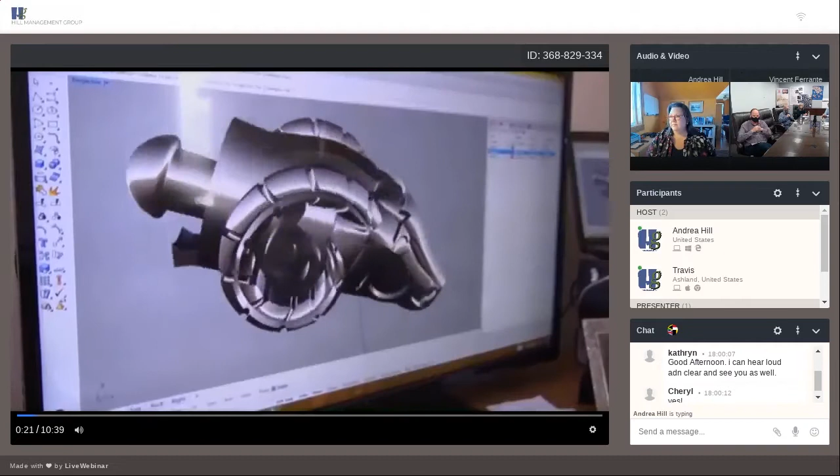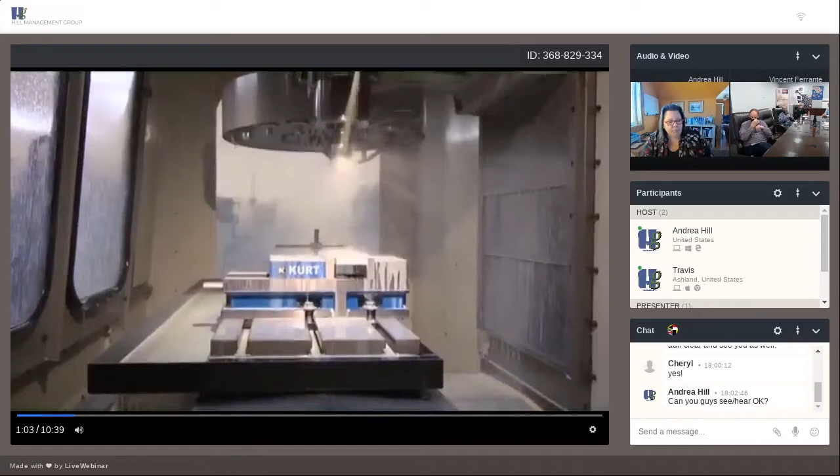National Chain has complete manufacturing capabilities. We can actually work from basic gold and bullion to finished product. We're one of the few companies in the industry that can offer a full service like this. With those capabilities and the talents of highly skilled craftsmen, National Chain Group produces an extensive line of precious and semi-precious pendant and fashion chain, earrings, findings, tubing, wire and beads, all at the highest standards. Their craftsmen have decades of experience, their machinery and technology is state-of-the-art, and they are vertically integrated—everything is manufactured in their own buildings.

We keep control of the process right from the grain, turning it into wire, flat stock, and tubing, and it's all measured for precision to make sure it flows through the process flawlessly. Among the more than 2,000 chain machines is some of the most specialized cutting-edge machinery in the industry, resulting in a consistently high-quality product for its clients.

National Chain Group, with its facilities in Rhode Island and Santo Domingo, produces millions of feet of chain and jewelry products annually. The offshore plant in the Dominican Republic enhances the company's manufacturing capacity, reducing costs for its customers who get a high-quality product on time and at competitive prices.

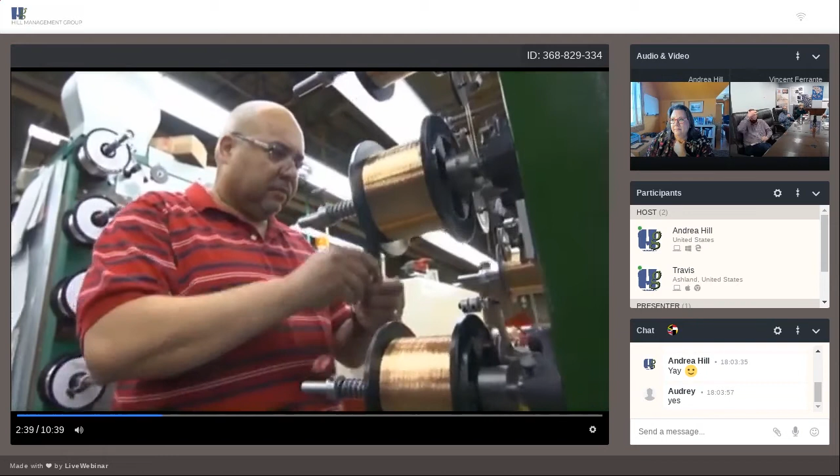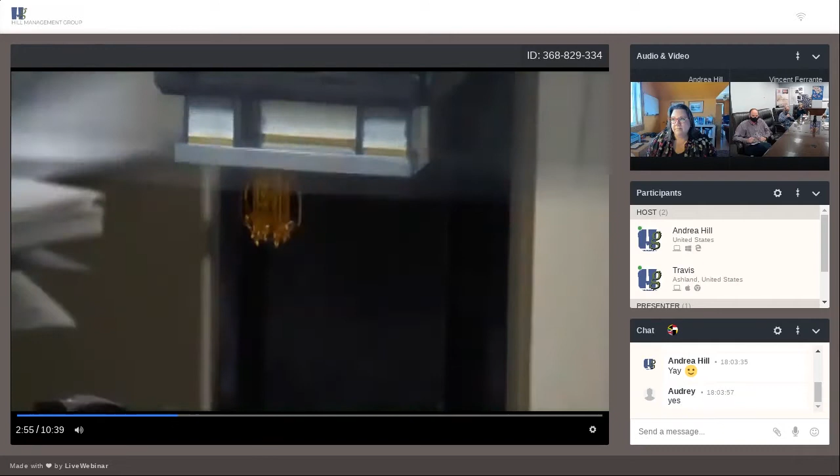Even with its impeccable reputation as a worldwide leader and one of the most respected full-service custom jewelry manufacturers in the world, National Chain is not sitting still. One of the keys to National's success is the fact that the management has decided to invest yearly in the development of new technology and new equipment. The rapid prototype equipment is cutting edge, top of the line.

This drive to vertical integration began in late 1997 when National Chain President Steve Cipolla decided that to increase his company's self-sufficiency and flexibility, it would begin making its own wire. The decision made a great deal of sense given the company's reputation as a prime supplier of pendant and fashion chain, the production of which required enormous amounts of wire on a daily basis.

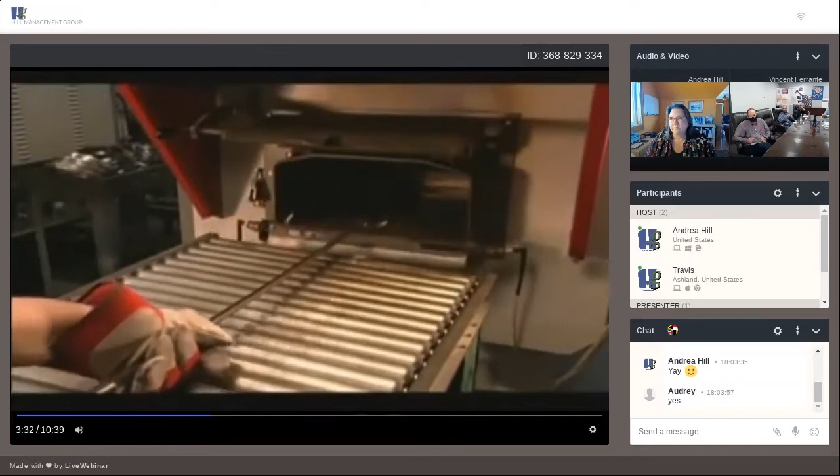Cipolla invested in the necessary equipment, from continuous casting machines to rolling mills and strand annealing furnaces. Wayne Wiesner, the company's special projects manager who oversees all of the company's mill operations, says that Steve is never afraid to invest. Even more investments enabled the company to produce tubing and flat stock for its findings division, along with solders in various grades. With each new investment, the vertical integration deepened.

But what began as an effort to make National Chain increasingly self-sufficient soon turned into a boon for its customers, who began turning to the company for their own metal needs. That demand ultimately led to the creation of a new division, National Fabricated Metals. Today, that demand continues to grow.

For example, Wiesner estimates that the company's weekly production of wire, if strung end to end, would span 2,000 miles. To put it in more visual terms, that's enough wire to stretch along the entire East Coast from the northernmost tip of Maine to the Florida Keys.

Such success has required the company to expand its mill operations, which are all conducted at the National Chain Headquarters Complex in Warwick, Rhode Island. A new addition there is increasing the company's total manufacturing space to 230,000 square feet.

What truly separates National Fabricated Metals from its competitors is not just its capacity, but also its flexibility and its ability to meet a range of customer needs. In that way, the mill division shares many of the same advantages enjoyed by all of National Chain's divisions: a breadth of expertise, high-tech equipment, and cross-functional operations. Those qualities also provide National's customers, from volume producers to specialty manufacturers, with an unparalleled competitive advantage.

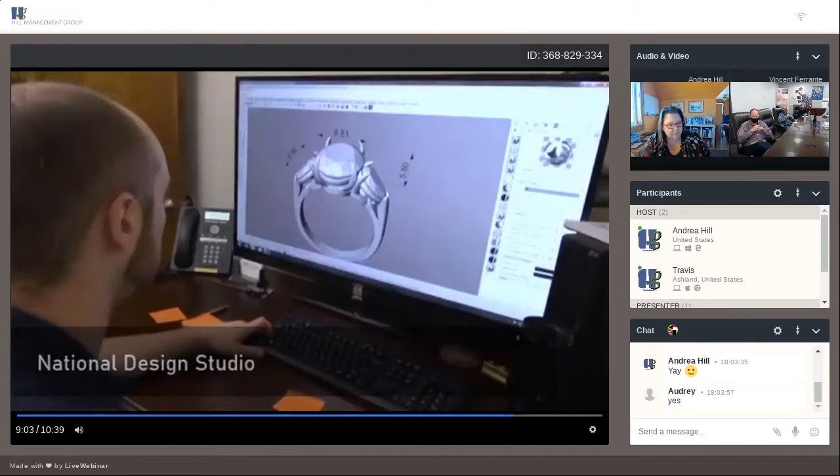National Design Studio can produce custom metal molds, personalized chain, findings, and jewelry.

National can also take a design from model to finished casting, on time and on budget, with their Village Goldsmith and Colorado Casting division. The Village Goldsmith has a 30-year reputation for superior production services, from CAD/CAM to casting, stamping, and sintering.

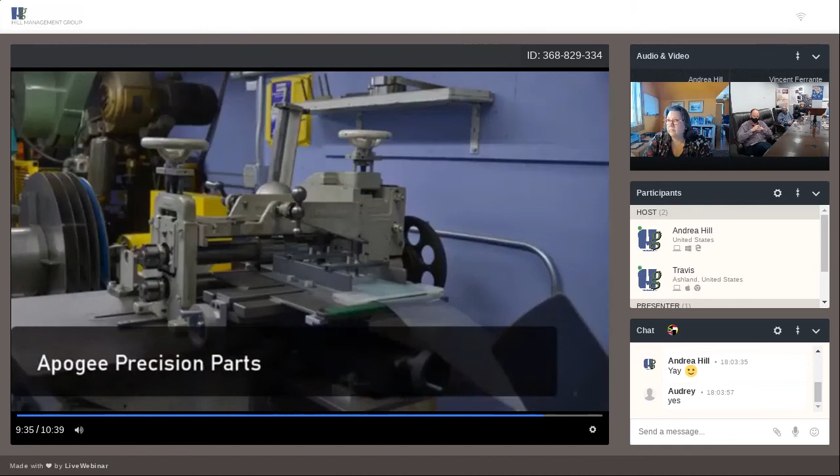Apogee Precision Parts is a dock-to-stock supplier that specializes in stamping and deep drawing metal parts for a range of industries. It manufactures everything from charms to capacitor components, medical implants, and diamond drill bits with zero defects.

C&W Steel Stamp Company is National's most recent acquisition. C&W offers high-end coining and striking services. It produces everything from charms and ID tags to coins and components with precise detail and accuracy.

The latest and finest technology, quality, old-world craftsmanship, exclusive chains and jewelry for any client's needs. That's what National Chain Group is all about. National Chain Group is committed to getting better every day. Contact them to see for yourself why they continue to prove to their customers that the possibilities are endless.

Over here from... there we go. All right, I think we're back on screen, right? Can you guys see me? Yes, we can. A little drag on this line today. I hope it was just the drag of fixing the screens and not a voice drag. Anyway, that's a lot going on.

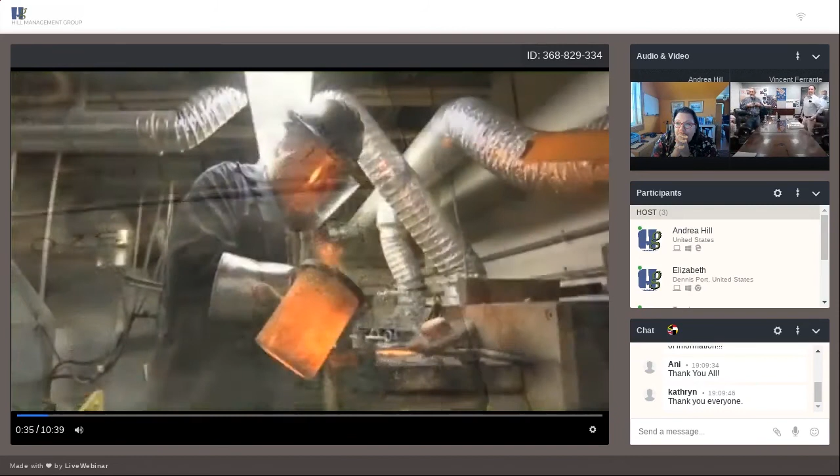National Chain has complete manufacturing capabilities. We can actually work from basic gold, bullion, to finished product. We're one of the few companies in the industry that can offer a full service like this. With those capabilities and the talents of highly skilled craftsmen, National Chain Group produces an extensive line of precious and semi-precious pendant and fashion chain, earrings, findings, tubing, wire, and beads, all with the highest of standards.

Their craftsmen have decades of experience. Their machinery and technology is state-of-the-art. They are vertically integrated. Everything is manufactured in their buildings.

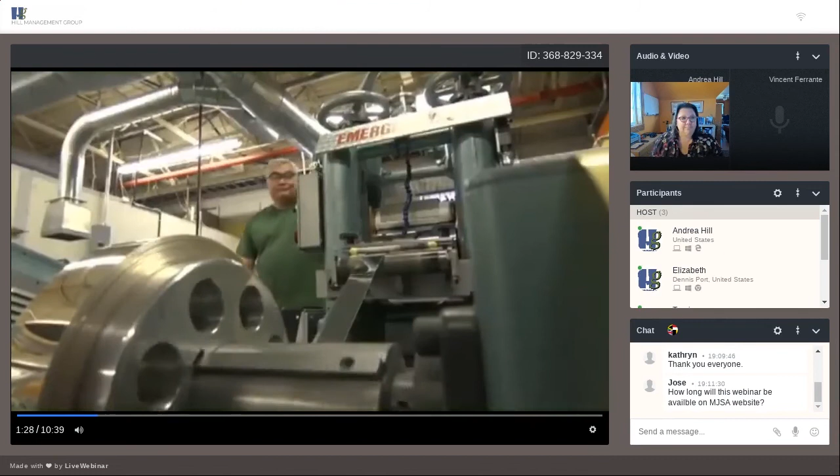We keep a control of the process right from the grain, turning it into wire, flat stock tubing. And it's all measured for precision to make sure it flows through the process flawlessly. Among the more than 600 chain machines is some of the most specialized cutting-edge machinery in the industry. The result is a consistently high-quality product for its clients.

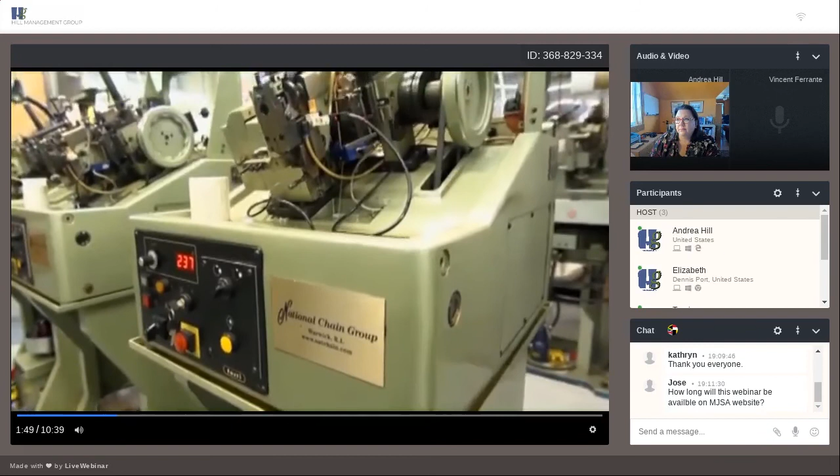National Chain Group, with its facilities in Rhode Island and Santo Domingo, produces millions of feet of chain and jewelry products annually. The offshore plant in the Dominican Republic enhances the company's manufacturing capacity, reducing costs for its customers who get a high-quality product on time and at competitive prices.

No wonder National Chain is featured in 2 television programs on prominent cable networks. The Science Channel profiles the company in its popular program, How It's Made. And National Chain is on the History Channel's series, Modern Marvels.

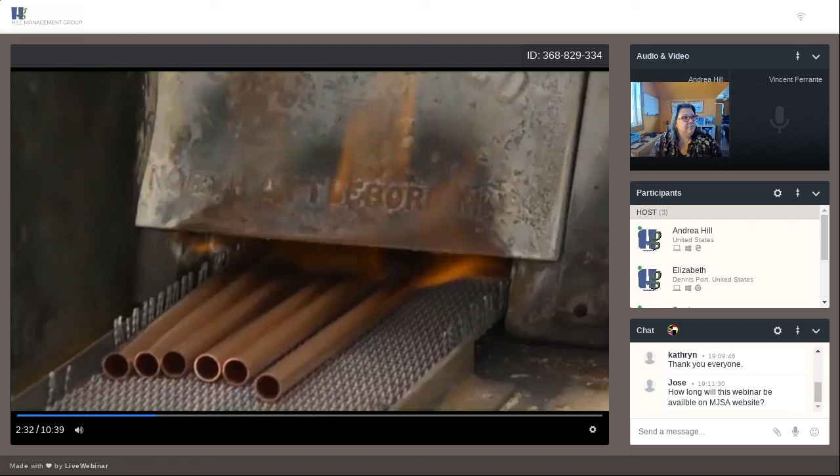At National Chain Group in Warwick, Rhode Island, 600 machines are running at maximum capacity every day to produce jewelry chain. Even with its impeccable reputation as a worldwide leader and one of the most respected full-service custom jewelry manufacturers in the world, National Chain is not sitting still.

One of the keys to National's success is the fact that the management of National Chain has decided to invest yearly in the development of new technology, new equipment. The rapid prototype equipment is cutting edge, top of the line.

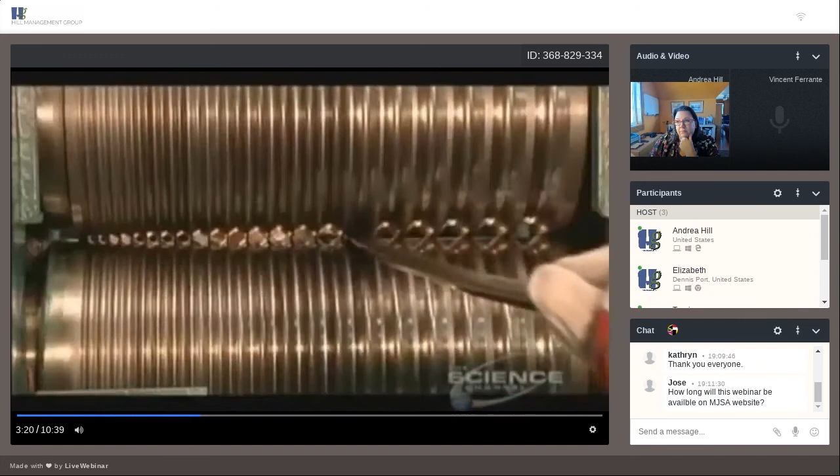This drive to vertical integration began in late 1997 when National Chain President Steve Cipolla decided that to increase his company's self-sufficiency and flexibility, it would begin making its own wire. The decision made a great deal of sense given the company's reputation as a prime supplier of pendant and fashion chain, the production of which required enormous amounts of wire on a daily basis.

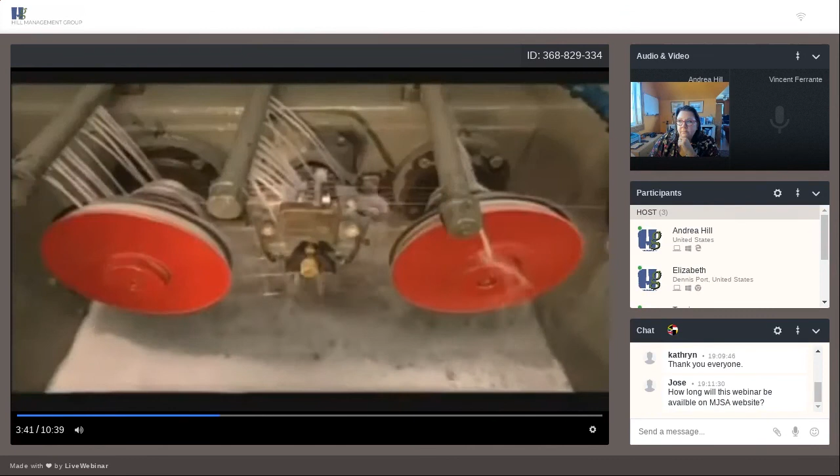Cipolla invested in the necessary equipment, from continuous casting machines to rolling mills and strand annealing furnaces. Wayne Wiesner, the company's special projects manager who oversees all of the company's mill operations, says that Steve is never afraid to invest.

Even more investments enabled the company to produce tubing and flat stock for its findings division, along with solders in various grades. With each new investment, the vertical integration deepened. But what began as an effort to make National Chain increasingly self-sufficient soon turned into a boon for its customers, who began turning to the company for their own metal needs. That demand ultimately led to the creation of a new division, National Fabricated Metals.

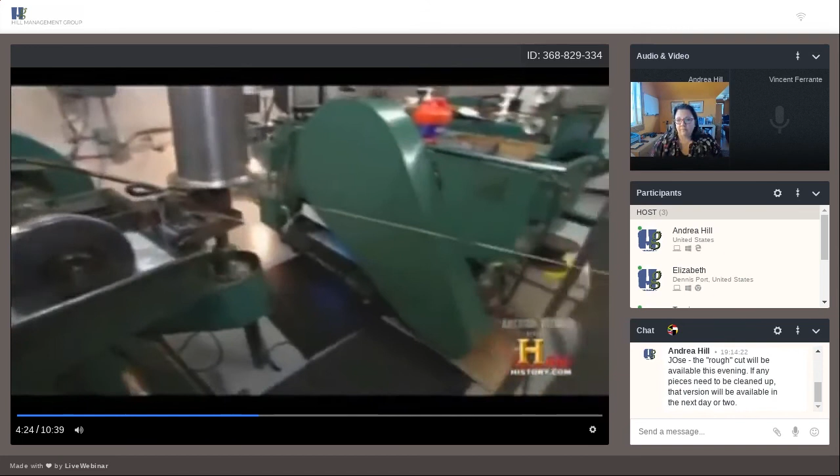Today, that demand continues to grow. For example, Wiesner estimates that the company's weekly production of wire, if strung end to end, would span 2,000 miles. To put it in more visual terms, that's enough wire to stretch along the entire East Coast from the northernmost tip of Maine to the Florida Keys.

Such success has required the company to expand its mill operations, which are all conducted at the National Chain headquarters complex in Warwick, Rhode Island. A new addition there is increasing the company's total manufacturing space to 230,000 square feet.

What truly separates National Fabricated Metals from its competitors is not just its capacity, but also its flexibility and its ability to meet a range of customer needs. In that way, the mill division shares many of the same advantages enjoyed by all of National Chain's divisions: a breadth of expertise, high-tech equipment, and cross-functional operations. Those qualities also provide National's customers, from volume producers to specialty manufacturers, with an unparalleled competitive advantage.

National Fabricated Metals may make enough wire to circle the globe many times over the course of a year, but quantity is not the whole story. Another facet of that story is how National provides its customers with choices.

The wire, for example, can be manufactured in all colors and karats of gold, including 24 karat, as well as sterling. It can be engineered to meet the most exacting tolerances. The diameter can be drawn down to that of a human hair when needed. And National Fabricated Metals is one of the industry's few suppliers that offer solder-filled wire.

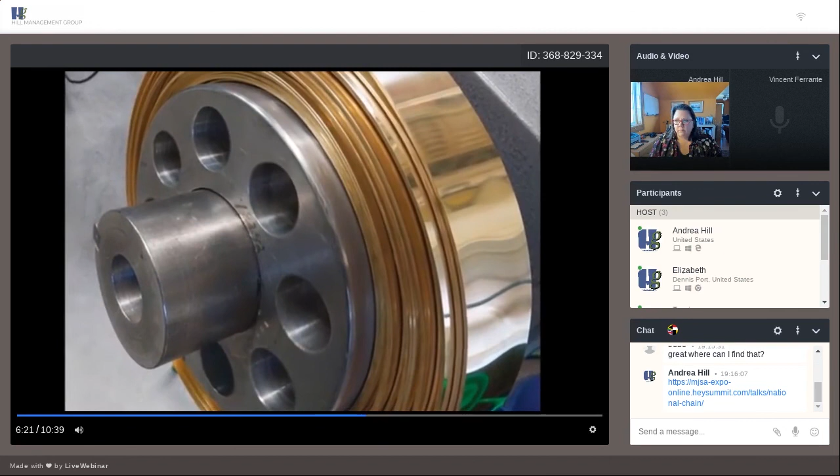Customers have the same range of choices when ordering tubing or flat sheet. The tubing, available in either solid or seam-welded forms, can be reduced so that its walls are as thin as a wafer without giving up strength and durability. The same holds true for flat sheet, which, like the tubes, can be cut to order or modified to meet a customer's specific needs. And that willingness to modify leads to another facet of the story. National exhibits an unmatched dedication to meeting its customers' demands, no matter how tight the tolerances or the deadlines.

National also applies rigorous quality control standards. After the initial fire assay, the company uses advanced X-ray fluorescence technologies at every part of the fabrication process, from grain through final form, to ensure the highest standards are consistently maintained throughout.

The National team also follows the highest sourcing standards. As a certified member of the Responsible Jewelry Council, or RJC, National has committed itself to following the RJC Code of Practices and to integrating ethical, human rights, social, and environmental considerations into their day-to-day operations. More and more consumers have questions about how companies obtain the metals used in jewelry, and National is taking the steps necessary to ensure that their customers can purchase from them with total confidence.

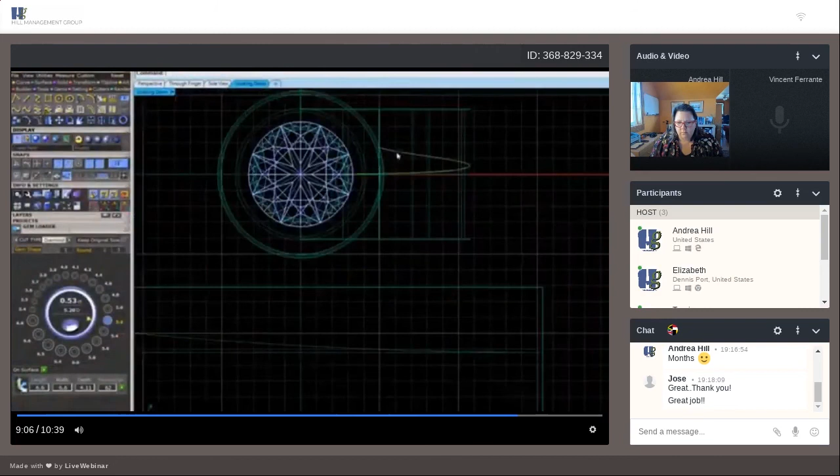National Design Studio can produce custom metal molds, personalized chain, findings, and jewelry. National can also take a design from model to finished casting, on time and on budget, with their Village Goldsmith and Colorado Casting division. The Village Goldsmith has a 30-year reputation for superior production services, from CAD/CAM to casting, stamping, and sintering.

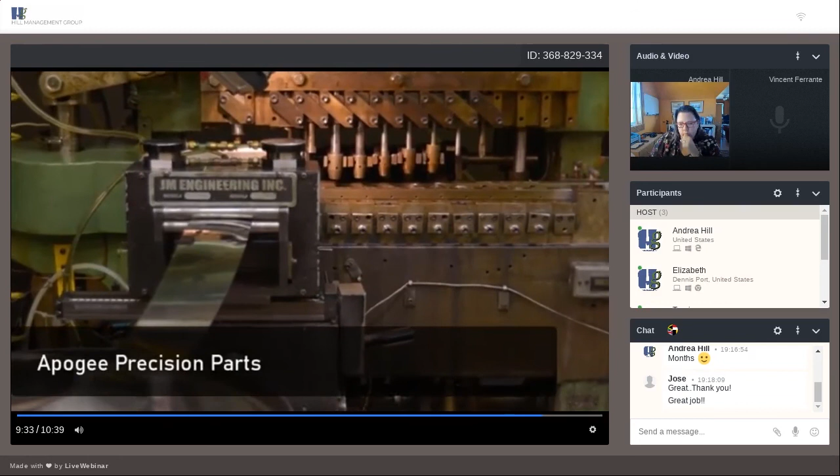Apogee Precision Parts is a dock-to-stock supplier that specializes in stamping and deep drawing metal parts for a range of industries. It manufactures everything from charms to capacitor components, medical implants, and diamond drill bits with zero defects.

And C&W Steel Stamp Company is National's most recent acquisition. C&W offers high-end coining and striking services. It produces everything from charms and ID tags to coins and components with precise detail and accuracy.

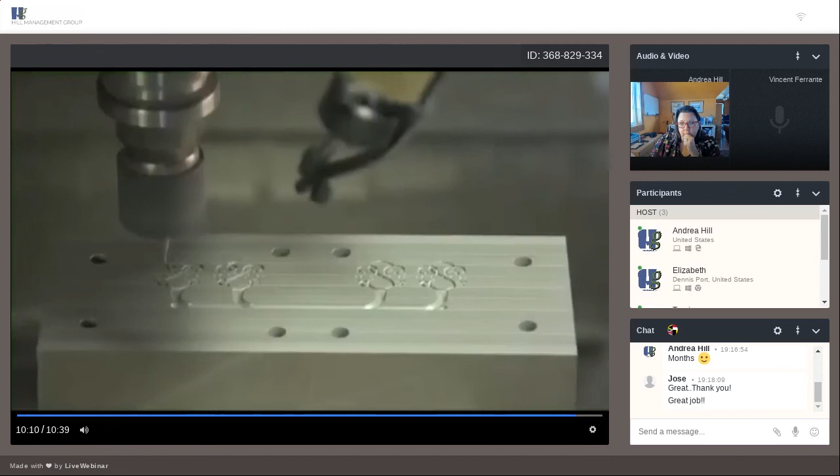The latest and finest technology, quality, old-world craftsmanship, exclusive chains and jewelry for any client's needs. That's what National Chain Group is all about.